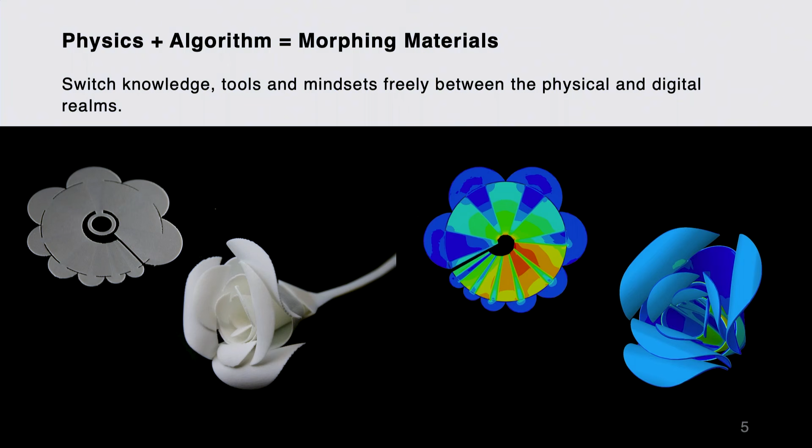So embodied intelligence in the context of physics plus algorithm. We design a lot of morphing materials. So when we think about those, we really think about it as material systems that carry hidden forces that are usually calculated or predicted based on some computational algorithm. That's why we think morphing materials are physics plus algorithm. So usually you deal with a certain physical morphing mechanism and you think through how do you compute them, model them, and how do you do inverse design by leveraging these kinds of physical phenomena.

So through the years, we've been looking into different material systems that could leverage this mindset for design and engineering, all the way from shape memory plastic to pneumatic elastomeric systems to even clay and even edible gels. And most of the projects share the commonality of physics plus some sort of computational design behind it. So here are some quick examples.

So for example, we once looked into basically the idea that residual stress release inside thermoplastic can be seen as a way to engineer self-folding and self-assembled structures. So essentially, we're using FDM printers, fused deposition modeling method, to extrude shape memory polymer and lock some residual stress in place while you are printing them.

And then later, if you try to heat it up, the stress will be released and the filament tends to shrink. So if you print this shrinkable material on top of a non-shrinkable material, you can create an effective bilayer that will bend when you introduce extra heat to it after the printing. So this FEM simulation is basically trying to simulate what's happening, and then, knowing a bit of the physics, we know we can do some sort of a bending actuator.

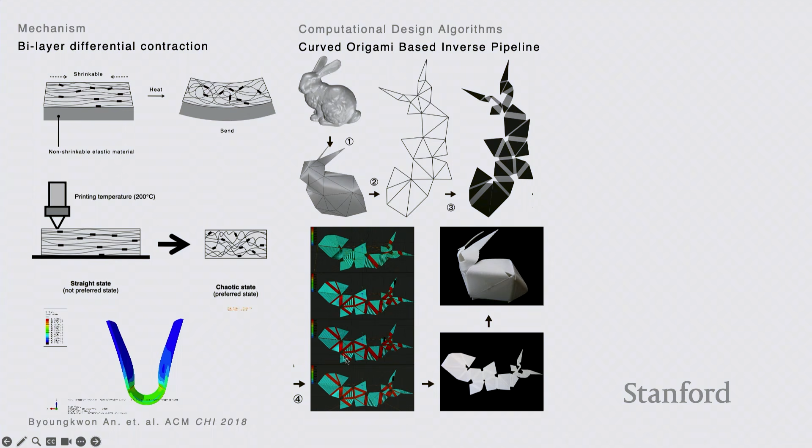We move on to the computational side, try to leverage an origami algorithm to compute the local bending angle needed, the accumulated bending angle needed at each hinge area, so that we can generate a G-code with prescribed residual stress at each local folding area. And we print everything flat, but once you put it in water, heat it up, it can self-fold back into

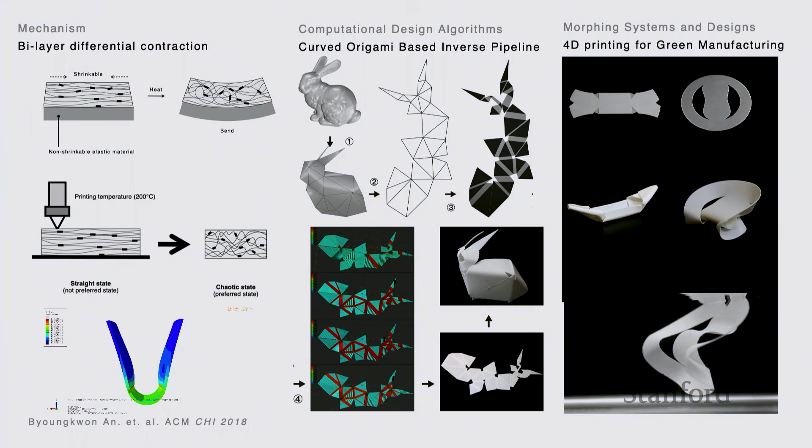the Stanford bunny shape. And with that, you can start to design all interesting shapes that can self-assemble from a flat piece. A flat piece, when placed on a hot water surface, turns into a boat, or a disc turns into a chair. So this is a little bit inspired by IKEA flat pack furniture to save packaging and shipping space. But once it's on site, you could assemble them. But in this case, it could assemble itself.

If you're interested in the computational part of it, this is a very simple and standard origami flattening algorithm. You simplify a 3D model into a finite number of flat faces, and you calculate the folding angle needed at each hinge. But here we need to do something different from a traditional origami model.

In a sense, we need to compensate for the width needed, because it's a smart material. Any material needs a certain width for bending to happen, whereas in the traditional origami model, because it's based on very thin paper, that width is ignored. So we had to do some offset on the algorithm side to take into account the width of each bending region. And the width is indeed different depending on the bending angle needed.

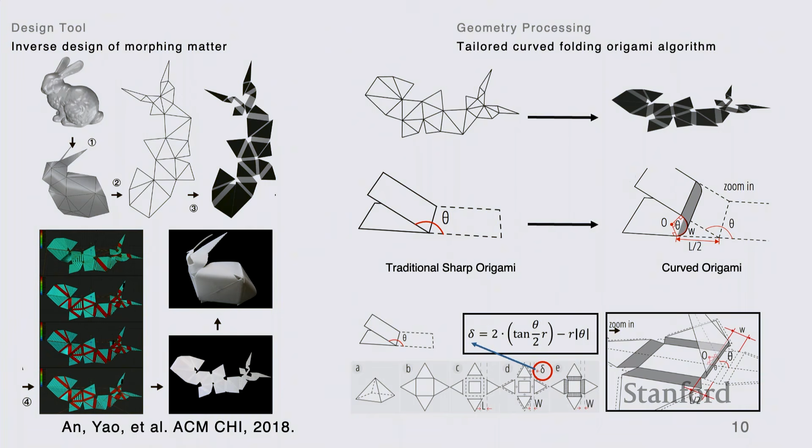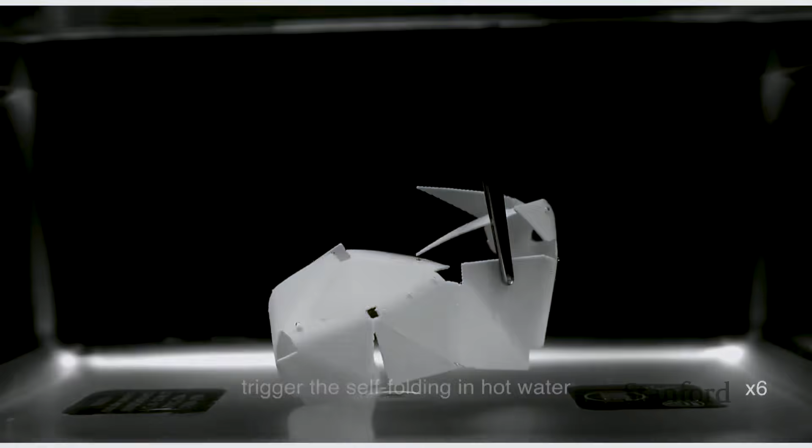Anyway, this eventually gave us a software platform where you can input the 3D model, simplify it into flat faces, calculate the bending angle, generate the G-code from it, and print a flat piece. This is showing that once you put it in hot water, the flat piece can self-fold into the bunny shape. So this is based on this very simple bilayer phenomenon.

Fundamentally, as I mentioned, this is related to the residual stress release of a thermoplastic, and the residual stress was built in during the printing process. So instead of doing a bilayer, we can explore a different physical mechanism, which is leveraging the local linear shrinkage rate. In this case, it's not a bilayer anymore. We print a single layer, but depending on the print speed or the layer thickness, we can embed different amounts of residual stress in different local areas.

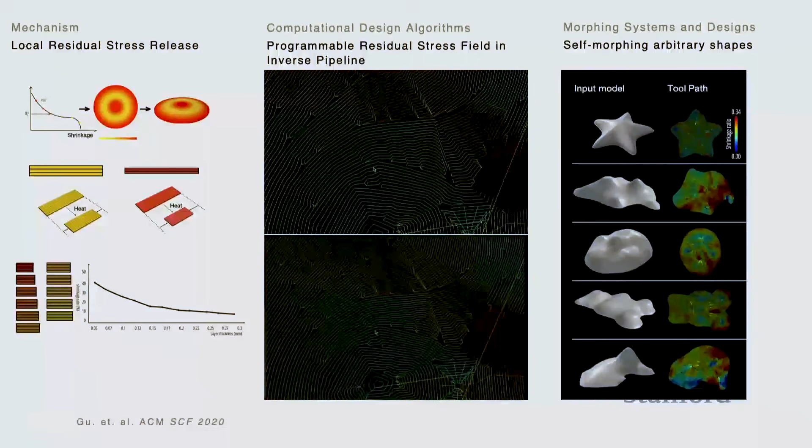You can print a disk. Once you heat it up, it morphs into a dome, for example, or a cone. And you can do computation now to make more arbitrary shapes. If you're a little bit into computer graphics, you might recognize that we can now analyze shapes that are non-developable. Origami shapes are a bit easier to handle geometrically because they're developable. So here we developed an algorithm that deals with non-developable shapes such as a human face or a very specific mountain terrain.

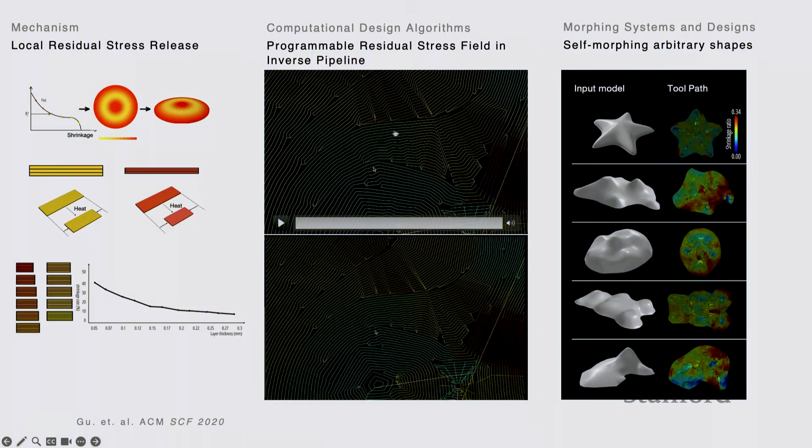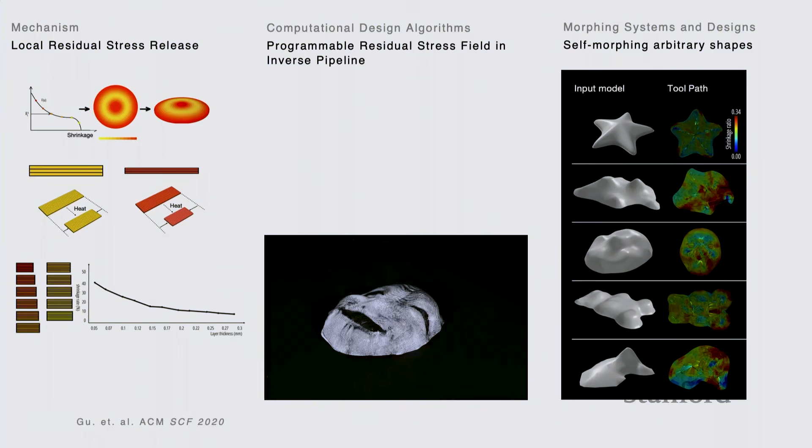Basically, you input the 3D model, it flattens it and generates all the G-code. You see the G-code here; the color indicates the stress or strain level. And we can also simulate how it would morph into 3D. And again, you print a flat piece, in this case a flat disk, that morphs into a face after you give it extra heat.

So we had a lot of fun with thermoplastic, and then we moved on to look at some other physical phenomena as well. This is a representative one that I love a lot. It looks at a physical phenomenon called differential swelling, tuned by the surface pattern. Imagine this is a swellable gel. You put it in water, and it just uniformly grows thicker and wider. But if we introduce sub-millimeter scale grooves on one side of the gel, it impacts the swelling rate and ratio across the thickness. The side with the grooves ends up swelling more slowly than the side without.

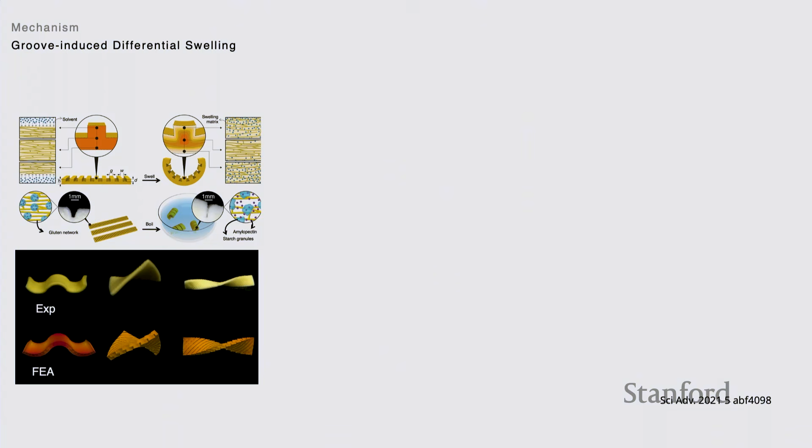So if you let it swell in a solvent, in this case a starch gel in water, you will see a flat piece bend up. Essentially, it's still a bending actuator like what I showed with the thermoplastic, but the physics going on is very different. This is differential swelling, and the previous one is residual stress release. Once we get to know the physical phenomenon, we plug it into a computational pipeline. In this case, we had to develop a pipeline to tell us how the grooves are supposed to be distributed.

So if our end goal is to get a rose flower, we produce a flat stamp with a groove pattern on it, and then we stamp it on a swellable gel to create the surface texture on the gel, and that's what we are showing at the bottom. So a flat piece, if we put it in a solvent, automatically starts to swell and wraps itself up into a rose flower.

This phenomenon is really straightforward, with no magic chemistry. It's a purely structure-modulated morphing mechanism, but on the other hand it's powerful because it's broadly applicable to soft matter that can swell in a solvent. It could be, for example, to some extent, your dumpling cover being boiled in pure water. It could also be some sort of elastomer or silicone sheet being swollen in a polar organic solvent.

So we showed in a paper that we can even use this to make fun morphing food. In this case, you can make a grooved flat pasta. They're all flat-packed, like your IKEA idea, saving a lot of packaging space for food.

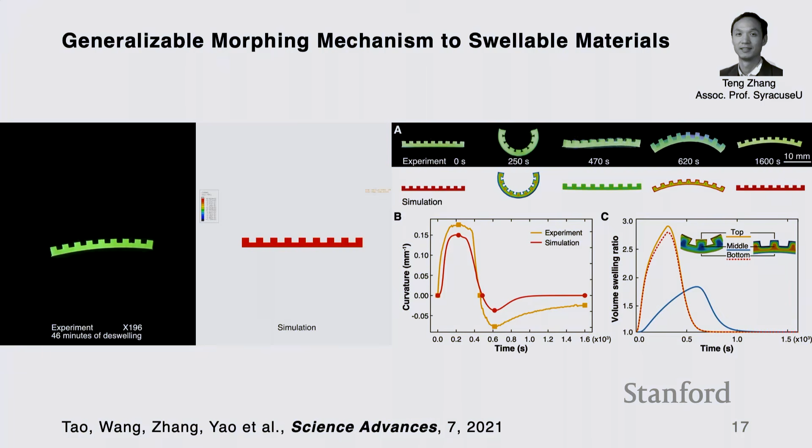Interestingly, if for a moment you ignore the physics, this is geometrically quite relevant to the pattern of the groove. So it turns out the width of the groove, the gap between grooves, and also the thickness of the groove will impact how much it bends. So there's a relationship you can derive experimentally, and then you can do regression, right, to get a sense how the curvature will be tunable based on the geometry of the groove.

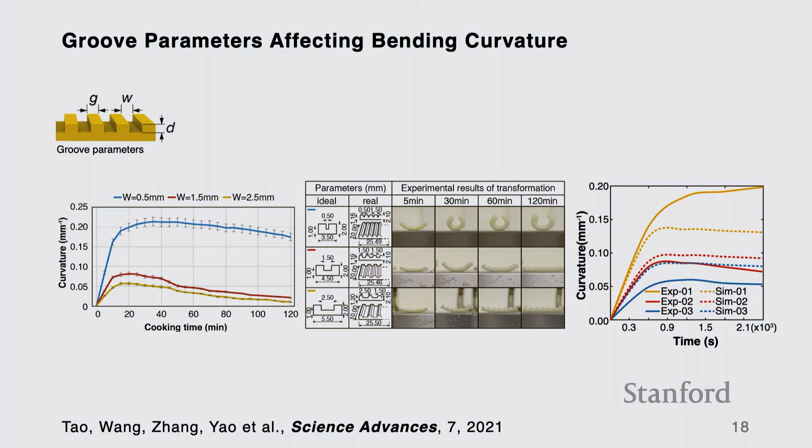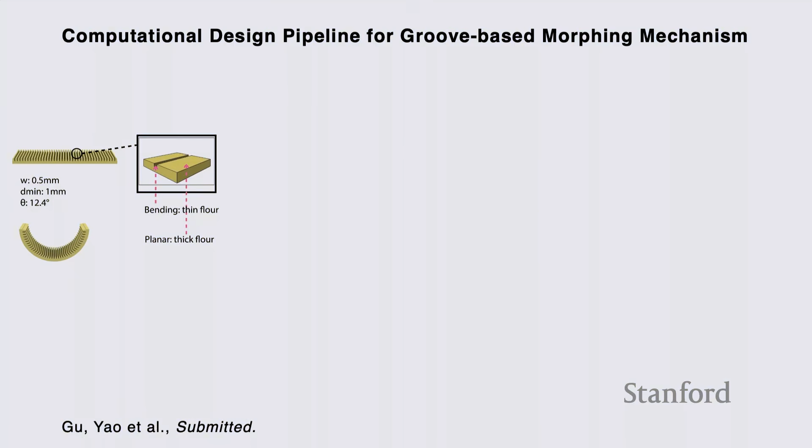So once we get that, we went into our comfortable zone of doing computational design with it. Based on the experiment, we concluded one groove contributes roughly 12.4 degrees of the bending angle. That basically means with two grooves, you get like 24.8 degrees. And you can imagine, I add one groove, I contribute like 20-some degrees. Then I add another one, I contribute 48. I add the third one, I contribute more. So that's how you could potentially design a flat sheet that can curve into any arbitrary shape.

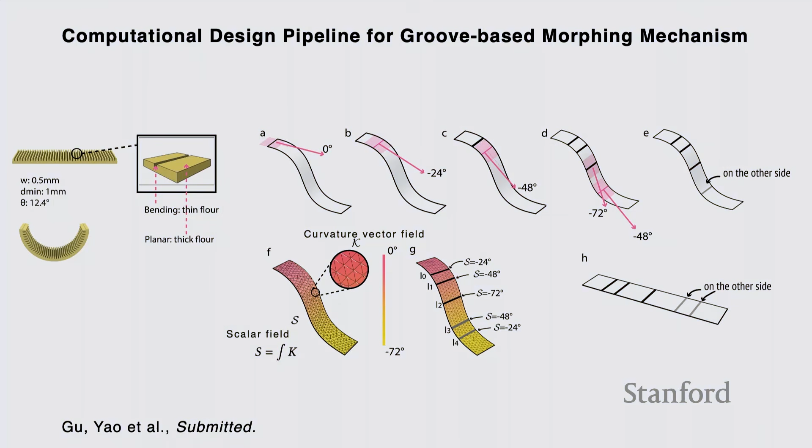But that's tedious. So in the computational graphics world, you can do this more holistically. Given a target shape you want your flat sheet to morph into, you could calculate the scalar field and then automatically derive the locations where you want to introduce the groove.

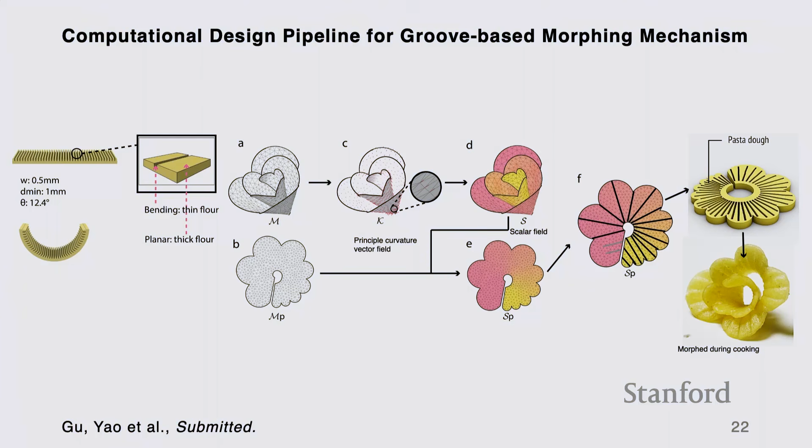So from that, you could go back to the complicated rose flower case I just mentioned. If you know your target 3D shape like a rose flower, you could unroll it to get the flat disk. You could then, in parallel, also derive the scalar field, and with that, you can map the grooves to the specific locations of this flat disk. Then we generate a 3D printed mold, which functions as the stamp. We use that to either mold cast or stamp on a flat sheet to get a morphing disk that will eventually morph into the rose flower if you put it into a swelling medium.

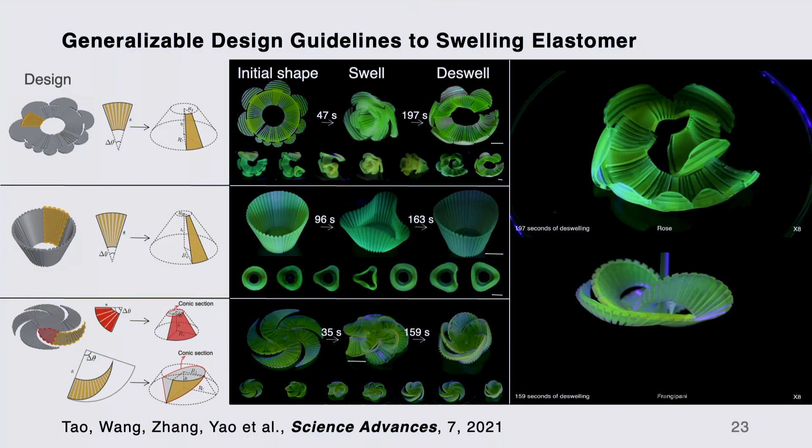And this can be applicable to a lot of gels. In this case, we're using PDMS. If you are familiar with microfluidics and some biomedical soft robots, you know PDMS is basically compatible with the human body.

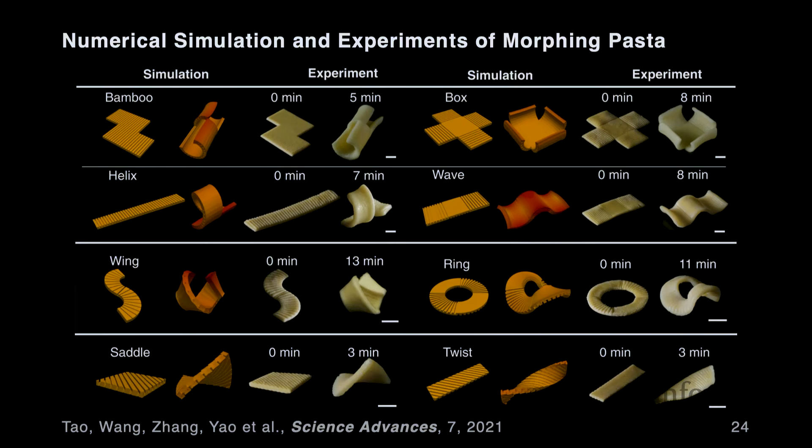So this is the fun application we did. These are dough, actually semolina flour based dough, and we are doing the stamping on top of the dough. Once you boil them, they can take on different 3D shapes. So this is the morphing pasta example. On the left, these are showing some finite element simulations, and you are also seeing some real samples of the pasta.

If you ask why pasta, it's really fun, and it's a very universal phenomenon, right? Flour-based dough-ish food can swell in your kitchen as you boil it. If you also do a simple calculation, with macaroni pasta, about 67% of the space is used to pack air. So if you make pasta that can be packed flat, you can save a lot of packaging space. We actually brought this to Italy, and in Italy, basically 1% of the greenhouse gas emissions is generated by consumption of pasta.

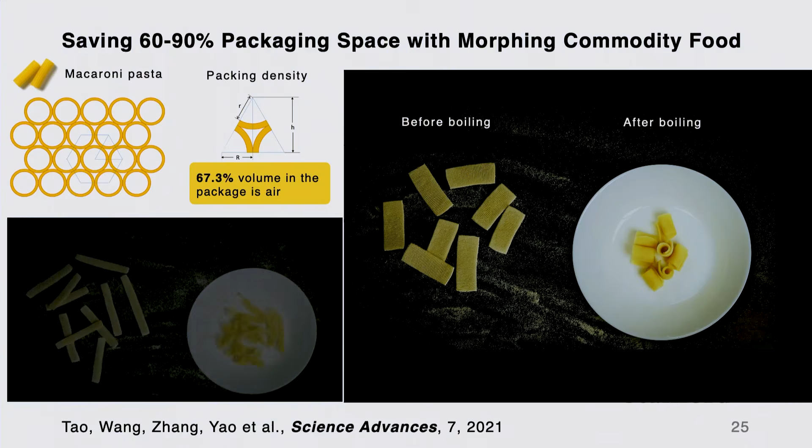So we eventually convinced Barilla, the biggest pasta manufacturer, maybe in the world, definitely in Europe, to collaborate on the project. So yeah, it's pretty fun.

Okay, so that's some sort of intelligence related to how physics combines with algorithm. I want to share my second point. That is that embodied intelligence can be sort of amplified by combining materials and mechanism. So I want to believe what I just showed are mostly materials. They are passive, right? They're gels, they're thermoplastic. They can do certain things, but they're also quite limited.

Some PhDs in my lab, through different kinds of projects, started to bring up the idea that if you can combine smart material with some structural intelligence or mechanisms per se, you could have more programmability and controllability in morphing systems. So when I say smart material, temperature, stimuli responsive, it'll bend, it'll shrink, it'll change stiffness. That's about it. But there's no degrees of freedom. There's no sophisticated kind of structural programmability into it.

So what I just played on this video is a stiffness changing material. So this is, again, a shape memory polymer, and in this case we had an almost invisible heating wire embedded in, but basically if you heat it up, it becomes really soft, otherwise stiff, and it can remember its shape, so it automatically recovers back to straight if there's no external constraint.

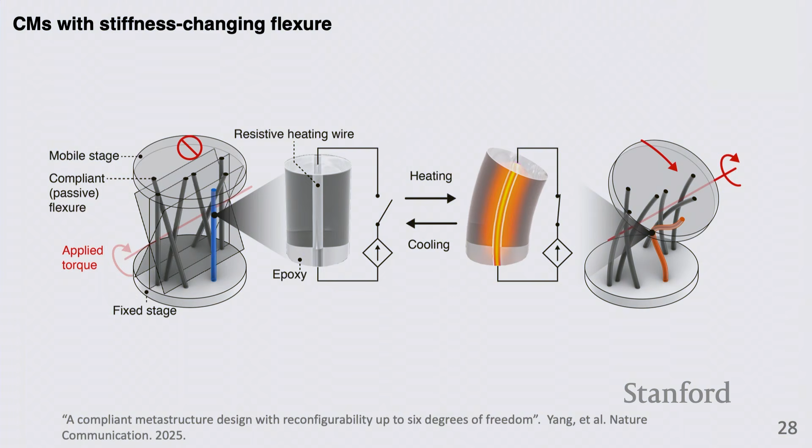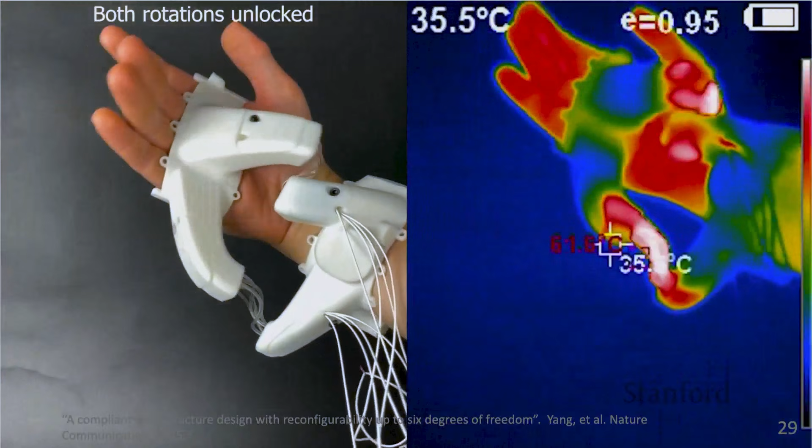And this is one example we showed in that paper. This is completely stiff, both rotations locked, and this one is up-down rotation unlocked. So the palm can basically push inside, outside, and this is left-right rotation unlocked. So now you can do left and right, but not up and down. And then if all of them are unlocked, now you have full degrees of freedom. We talk about using this potentially for rehabilitation or some haptic device.

And one thing that we ourselves are proud of is we introduced a rational design pipeline, basically like an algorithm that allows us to design systems that have all 6 degrees of freedom fully reconfigurable. You could ask for what you want. For example, only X translation is flexible, all others locked. This depends on how you, again, arrange the stiffness changing rods versus the other non-stiffness changing rods.

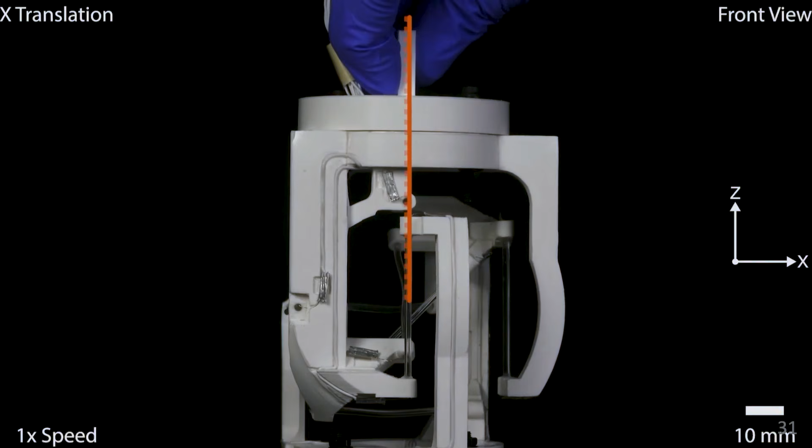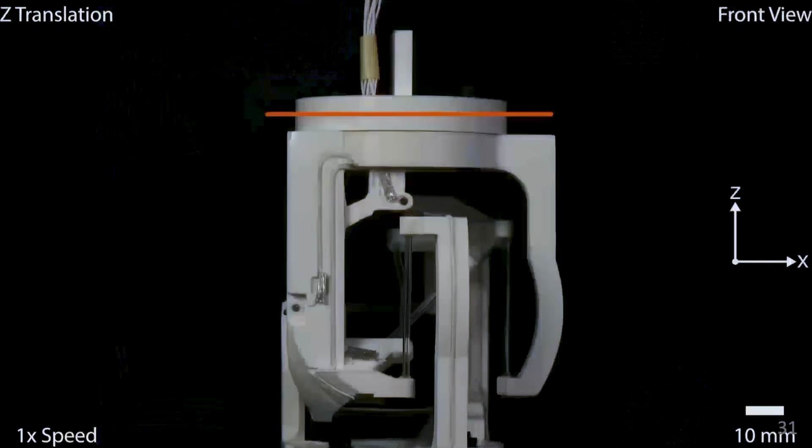And this is a video showing a bit of the same concept. So again, X translation now is freed because we heated up the selective wires our algorithm told us to heat up. And then this is Y translation being freed. It's already a different mode. This is Z translation being freed. This device really doesn't have any functional meaning. We just wanted to show the generalizability of the design method. And this is X rotation. So I'm gonna skip the video, but I think you get the idea.

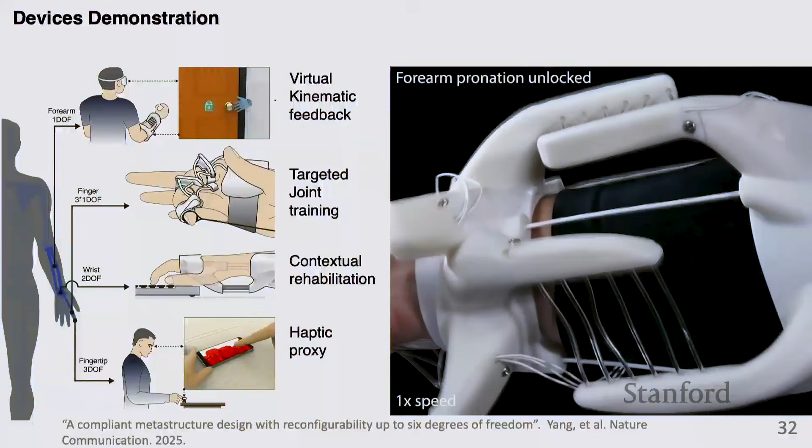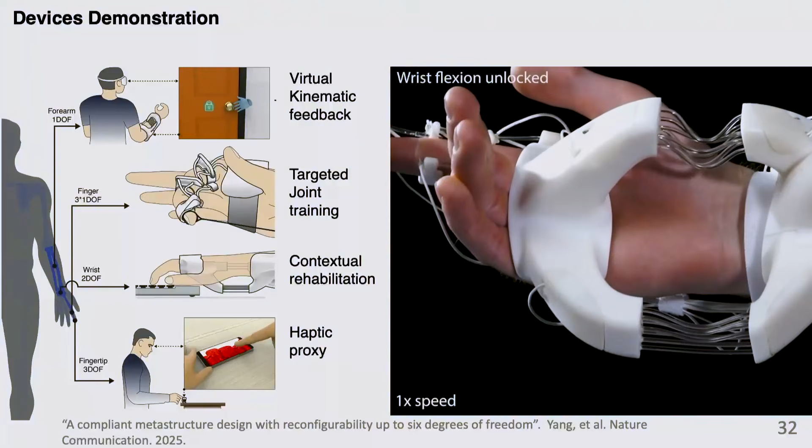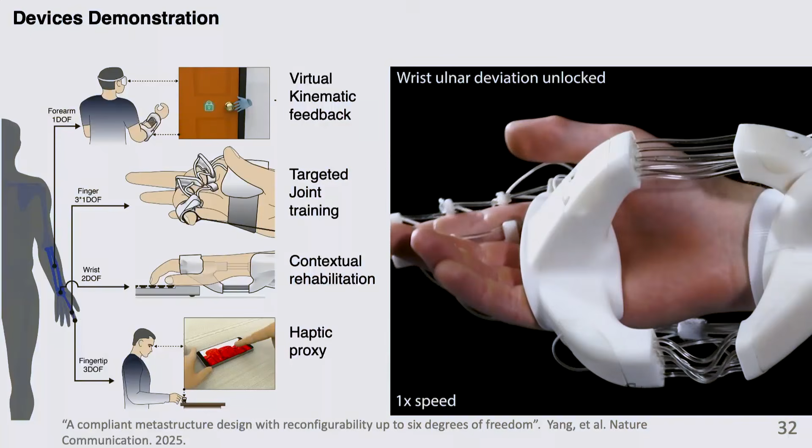So once we understand how to design the degrees of freedom as we want, we can look at some more specific applications. As I've already mentioned, we picture these types of exoskeleton devices can be used, for example, to constrain certain degrees of freedom, to do haptic, virtual kinematic feedback. For example, if I try to turn a doorknob, I can just free that rotational degree of freedom while locking the other ones. And we also picture we can, not fully heat up the wire, but heat up the wire partially with PWM, so that we can use it to do tunable rehabilitation training.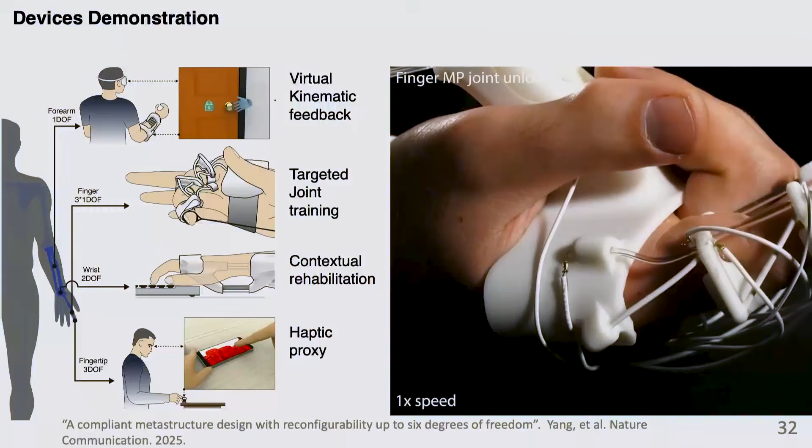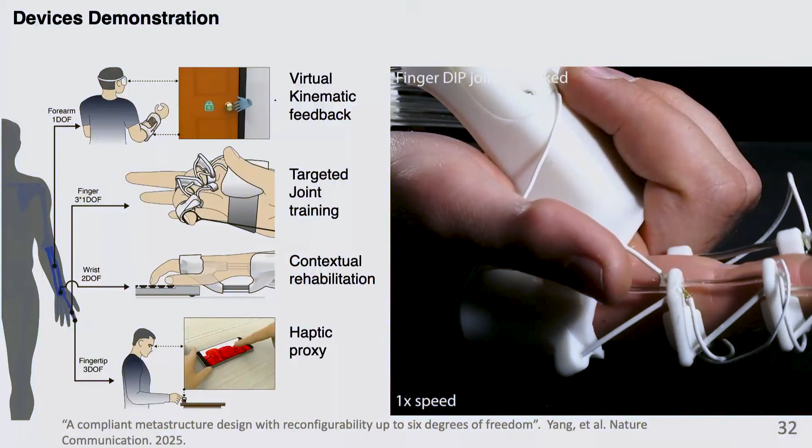And there are perhaps many other applications designers could think of. But I really see this project as a way to think about the combination of materials and mechanism, and it's very mechanical engineer friendly because my students, if they come from an engineering background, they love mechanisms.

And these are some ongoing work. So we're trying to explore some more complex sort of compliant mechanisms that could even have some computation or logical behaviors built in. So this is just a door latch, but it echoes back to my idea of physical cybersecurity.

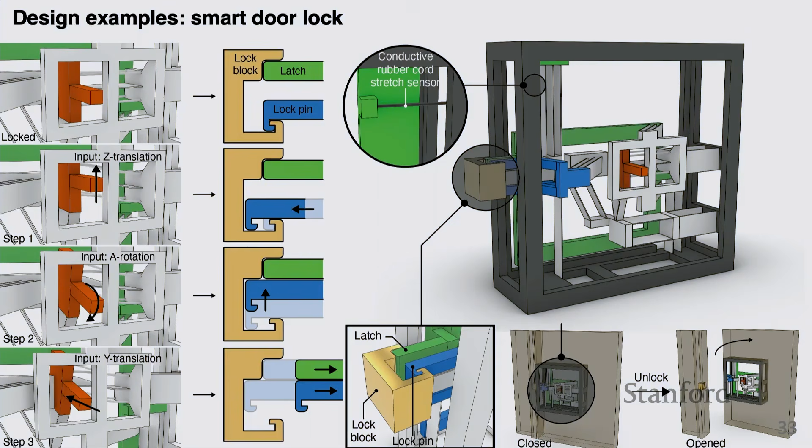So this door latch is purely mechanical, but you need to introduce 3 sequential motions to open it or to unlock it. So in this case, you have to do a Z translation first, followed by the A rotation, followed by a Y translation in order to basically unlock it. And this again is designed by this inverse pipeline we introduced in the paper.

This is just a video to show. Maybe the left one is a little bit more clear. So you can see the hand has to do that 3 sequential motion exclusively in order to basically open the door lock. We were very excited because this is really getting into that logical computation you could do with a compliant mechanism.

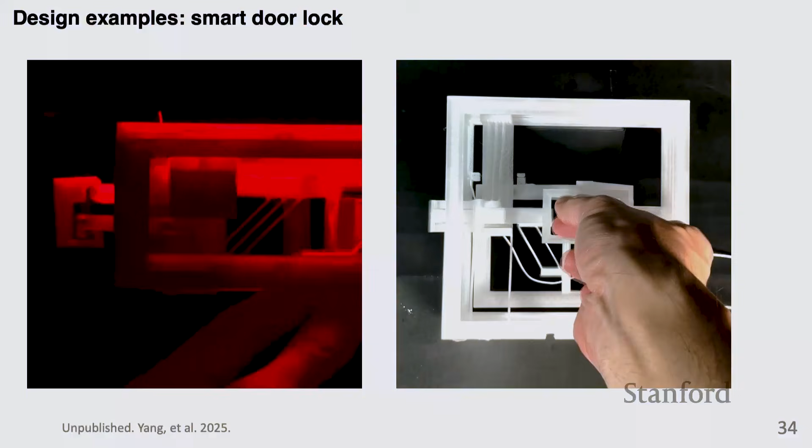And if we embed the smart rod, right, we can reprogram the possible logic you need. You know, this time you need to do this sequence to open the door, but next time if we soften a rod, you have to do a different sequence. So that's getting into that magical cyber physical security part of it.

We were also thinking, again, this is semi-conceptual, the design is not even mature, but the idea of leveraging this type of reprogrammable compliant mechanism to create a multi-modal robot. So this one, you think about the blue one as one group of flexures that can be softened versus the purple one as the second group.

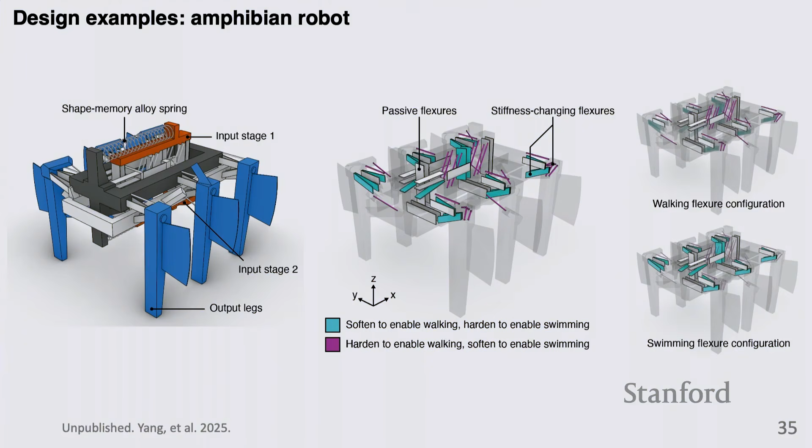And depending on which group you soften or harden, you could reconfigure this robot to either be a walker or be a swimmer. And this is just a simulation. We actually have not been able to implement this with a physical prototype. This is the walking mode, and this is the swimming mode.

No idea whether it's gonna work. At least the compliant mechanism part is correct, we are pretty sure. In terms of the swimming or walking, we have a lot of optimization to do.

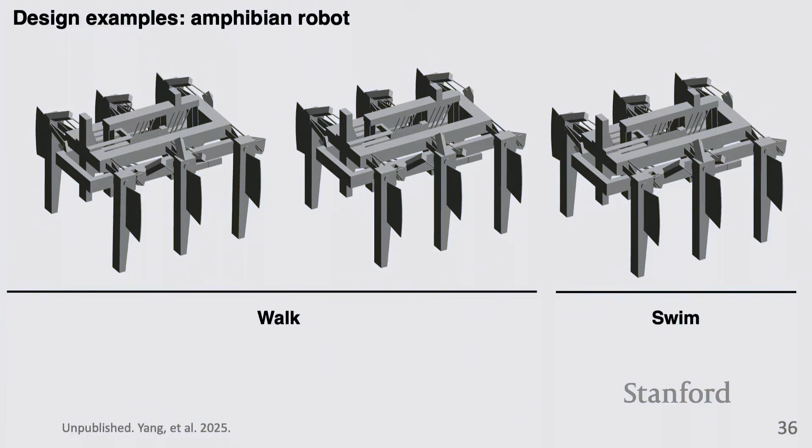So this is a different example. Again, I'm just stitching projects together to make the point that material in combination with mechanism could get us a little bit further than a pure material-driven system.

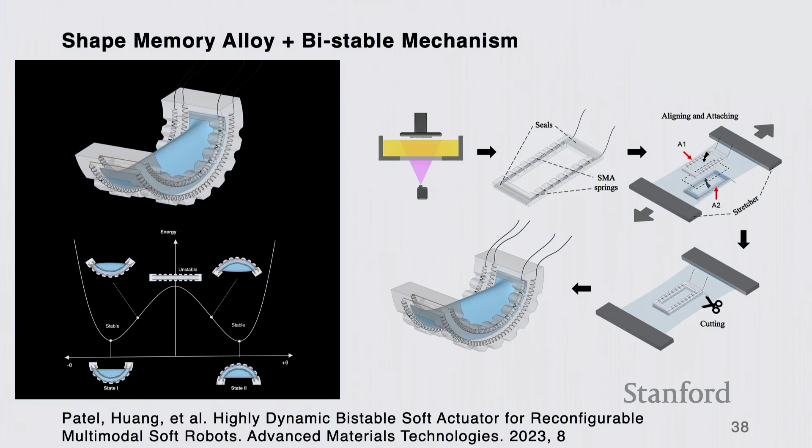Then by embedding this shape memory alloy, we could basically leverage the shape memory alloy controlled by electricity to quickly flip the side of this bending actuator per se. And this is what it is doing. Basically, again, you give it a current signal, it quickly flips.

If you have played with shape memory alloy, you know it's a little bit notoriously slow and pretty weak. But by combining that into a bistable mechanism, you can actually turn a very slow actuator into a pretty fast and hopefully more practical one for building robots.

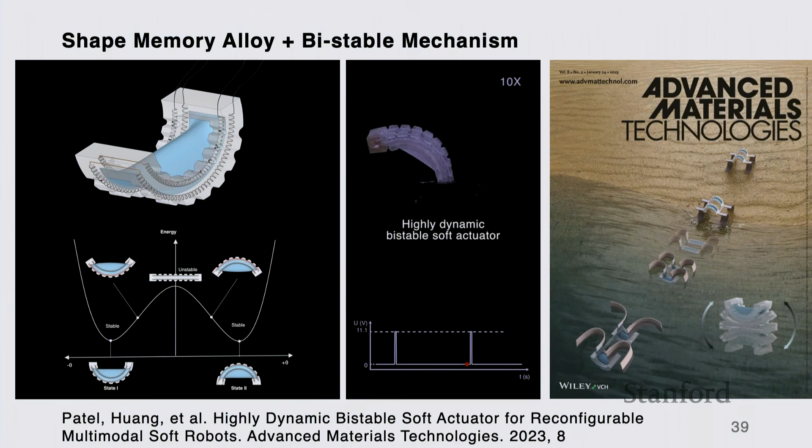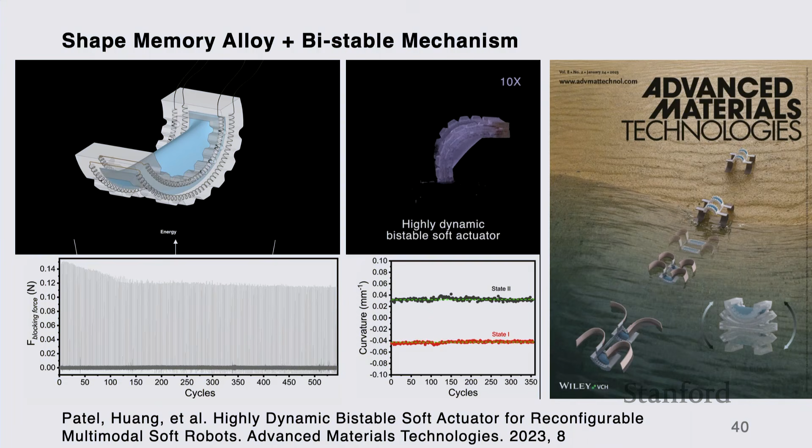And we're also showing this actuator has pretty good repeatability. In the lab, we tried to run it for more than 500 times, basically cycling back and forth. It's still behaving pretty well. And these are some of the robots we were able to build.

So this is the amphibian robot. Basically, the body is made of 2 of those bistable actuators. This is the walking mode, and then this is at the bottom. You flip the 2 actuators at the body. You make it into a swimmer, and this is very tiny, but it's showing this is walking.

This is getting into the water, and once it's in water, it flips its body, and the legs become the wing. Is it the wing? Yeah, the wing. And it started to basically paddle.

And because I mentioned it's very fast due to the bistable mechanism, you can make a jumping robot with shape memory alloy, which I thought is pretty magic. Because again, the actuator itself is very weak and slow.

So you could also basically reconfigure the body shape of the robot. So in this case, you can turn a walker into a roller. If it has to roll down the hill, they form a ball shape. Otherwise, they can just bend up and down to walk itself.

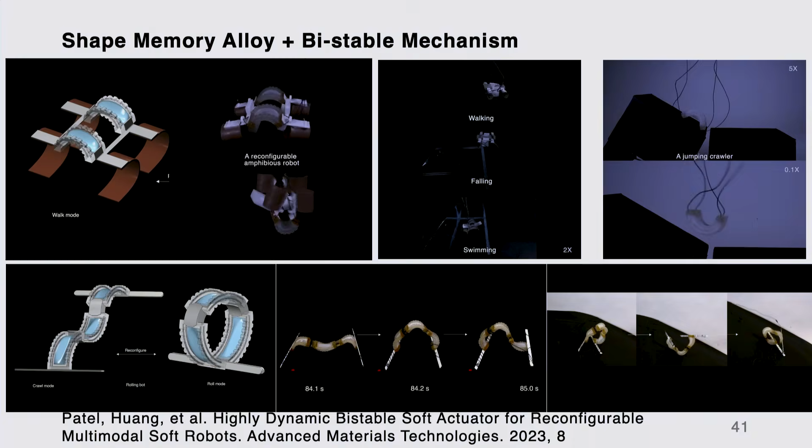Yeah, that's that. Continue with my third point.

So I also think, and we discussed this with many colleagues, about how far we can push with basically mechanical systems. I visited the robotics center and many robotic labs this morning at Stanford as well. I definitely saw a lot of hard robots, basically robotic arms driven by motors, with a very classic robust design.

And ultimately those machines give us the most precise control, right? The amount of torque is more ideal for heavy duty things. And it's fully controllable in a sense. You can easily plug in machine learning or sophisticated control policies to control those robots.

And mechanical systems or material-driven systems are the opposite. They're slow. They're not precise. They're very weak. Absolutely, in the field of soft robots and mechanical intelligence, we discuss a lot whether there's a killer app at all for mechanical systems.

I think we more or less started to reach the conclusion that maybe there's something that can combine both mechanical intelligence and computational intelligence and reach somewhere neither could achieve by itself. This is super experimental, exploratory thoughts. I actually can't really think of a very convincing robotic system that shows both perfectly.

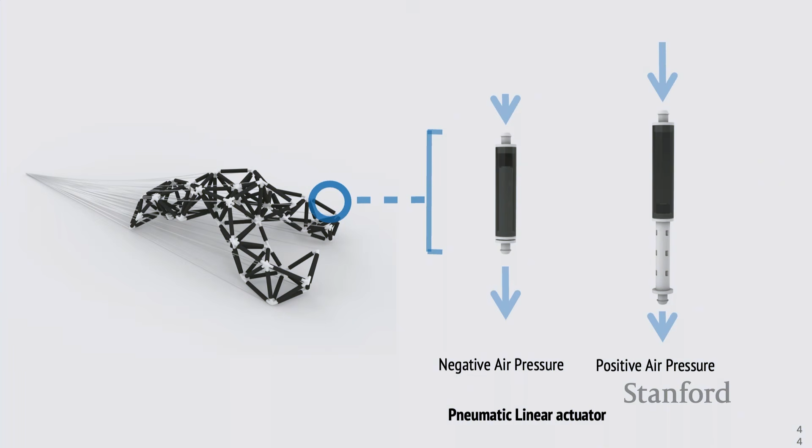So if we try to make a morphologically really complex mesh robot like this, in this case using pneumatic linear actuators, you have to have lots of separate control units, a lot of actuators, a lot of wiring, if you want to independently control each beam or truss. So for a lobster robot like this, you need 67 control modules. So we didn't want to do that.

We got quite inspired during my visit to the Northwestern Robotics Institute. Some biomechanics people told me about the muscle synergy concept: multiple muscle groups are grouped and work together to achieve tasks more efficiently.

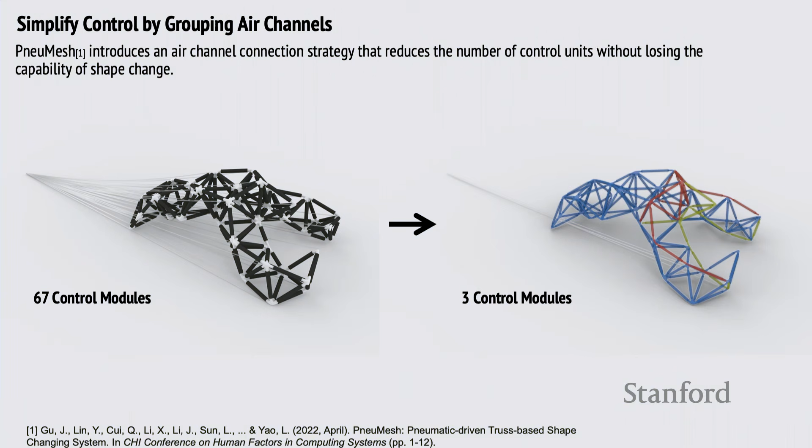So we started to look at this idea and thought maybe there are ways we could also mechanically group the muscle actuators together. So instead of 67 control modules, maybe we could have much fewer modules. In this example, just 3 control modules, but allow the mesh robot to do equally sophisticated things. So we ended up doing that.

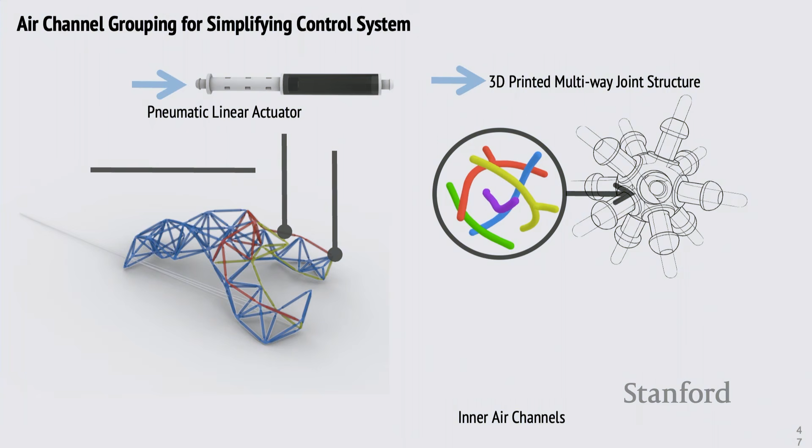So basically, if we need to group them, each node may have to carry multiple air channels. So we developed an optimization algorithm to automatically generate the air channel connections, and the basic idea is very simple, right? You have 3 groups, for example, represented by different colors, and depending on which group you deflate or inflate, you could get quite different actuation behavior.

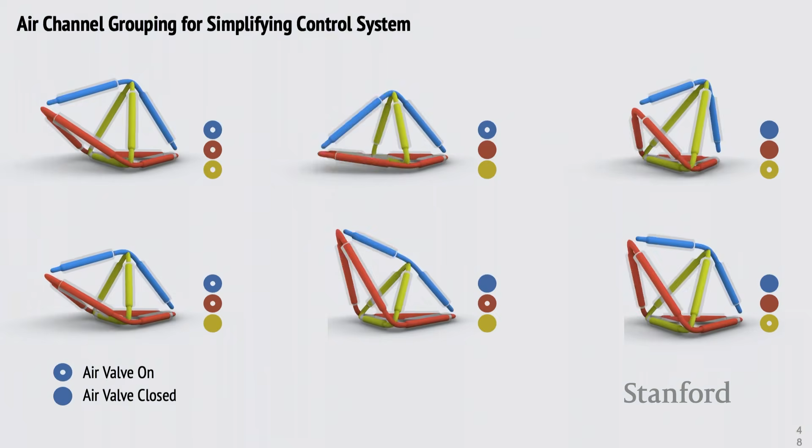So the design problem indeed is a little bit complex. You have to think about which beam to group with which, and you also have to think about the control sequence of all those beams, basically the control policy aspect.

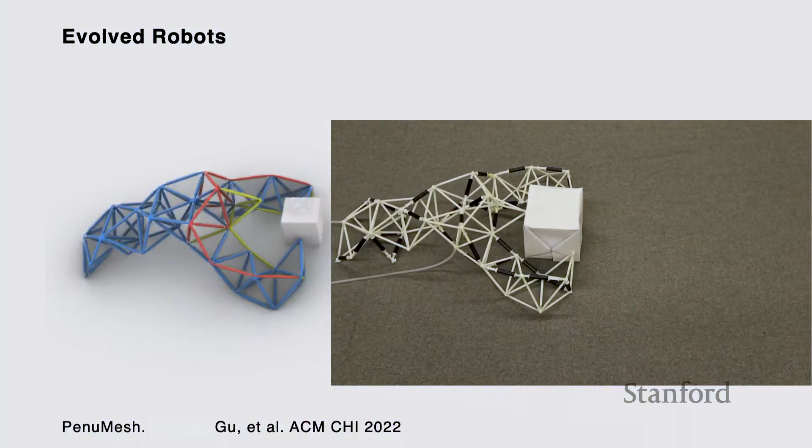Yeah, this is one of the examples. Again, that lobster designed by the idea I just mentioned, and we also tried to implement the physical version. You can see this lobster is only carrying 2 tubes in this case, so it's grouped into, I believe, 2 groups. And I mentioned the design task is kind of complex if you try to do it manually. You have to think about the grouping.

Also, each actuator control, how much contraction ratio you want out of each actuator. Also, the control sequence, basically the control policy, which group will be triggered at the same time, things like that. Now, if you want your robot to do multiple kinds of tasks, this is getting even more complicated. What if I wanted it to turn around while lowering its body? So it becomes kind of a multi-objective design task.

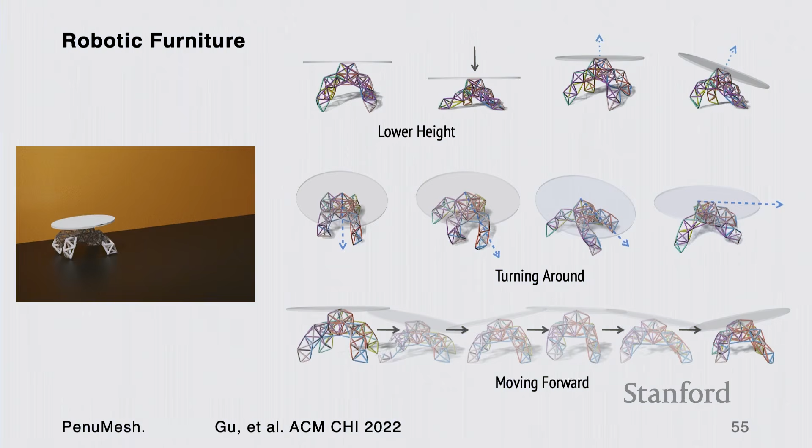Eventually, we decided a simulator and a manual design, meaning manually selecting beams in a software system, is not really practical. So we started to get into optimization methods. This was an earlier version, basically using a genetic algorithm to figure out how to do multi-objective optimization.

Basically, given all the input design factors, we can figure out how to group the channels and how to control the inflation and deflation. And later, we also explored how to use reinforcement learning to handle similar tasks. And recently, we started to also leverage generative algorithms to come up with the robot design as well.

Yeah, this is what we had out of the genetic algorithm. Again, the idea of this 4-leg robot being able to do multiple tasks through the optimization method I showed in the previous page. So it depends on the channel grouping and also the control signal. You could let the robot do different things while not changing the grouping, obviously. So this is showing walking, rotating, tilting, lowering the body, and things like that.

And why are we interested in such a complicated mesh anyway? I saw many mesh robots much simpler, right? Maybe like a single unit. I know colleagues over in the mechanical engineering department at Stanford have some really cool robots made of 1 or 2 units, basically maybe like 10 trusses. But we were interested in hundreds of trusses, partially because we can do it with the algorithm, but also because we were interested in understanding how that morphological complexity could bring some unique design spaces.

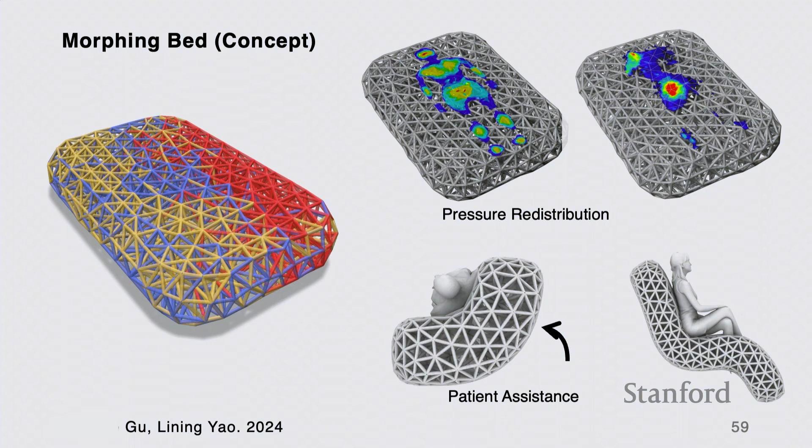Hardware-wise, not sure. So this was a proposal we wrote for a hospital, basically a morphing mesh bed that automatically fits the body shape or automatically adjusts the patient's body posture, because they get tired being fixed in one pose.

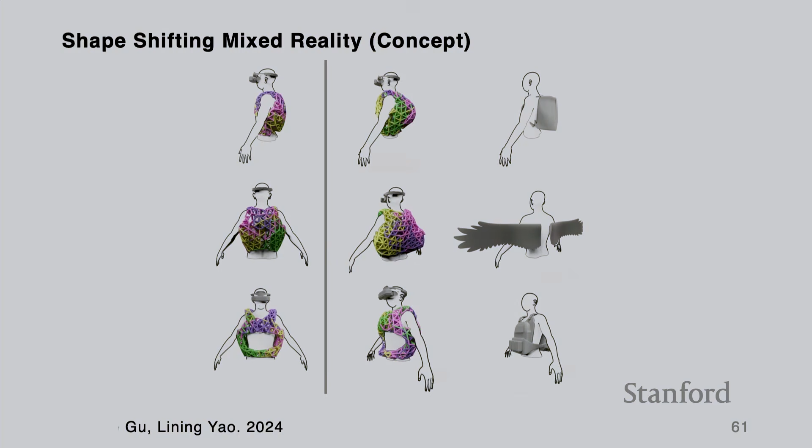You could also imagine if the mesh gets complex enough, you could really physically render different physical objects in a mixed reality environment, or in this case, basically give people different experiences. Say you are playing a game and you turn into a bird, how that physical mesh can morph. Not only is the shape morphing, right? Your center of gravity will be shifted as you are transforming the physical piece you are carrying as well.

Okay, so the last point I want to articulate: why embodied intelligence is interesting, what it's good for. I started with that question. I guess I didn't give an answer, but these are definitely the more tinkering side of it. My lab was also very interested in looking at how purely ambient-energy-powered systems could play a role in the field. Imagine field robots deployed massively in a distributed fashion that eventually degrade into the field.

And this could be convincing for why you do not want electronics to be part of it, why you want really cheap things to be made, why you maybe want minimum intelligence but still be able to execute the task as intended. So we started to play with this concept called ecological physical AI, or ecological morphing matter. The idea is they are some sort of mechanically intelligent robot, but they are powered by the environment, whether it's sun, moisture fluctuation, or even geothermal energy.

And you design a physical system that could smartly harvest that energy, and also maybe some sort of mechanical computational unit that could take this input signal, process it, and make decisions in terms of what to use that energy for on the actuation side. So that's a framework we started to develop. This is not published yet, but it represents some of our thoughts: how you perceive natural stimuli as signals, how you build mechanical devices that rationally filter and process those signals, and how you couple that with morphing materials and structures to do useful things.

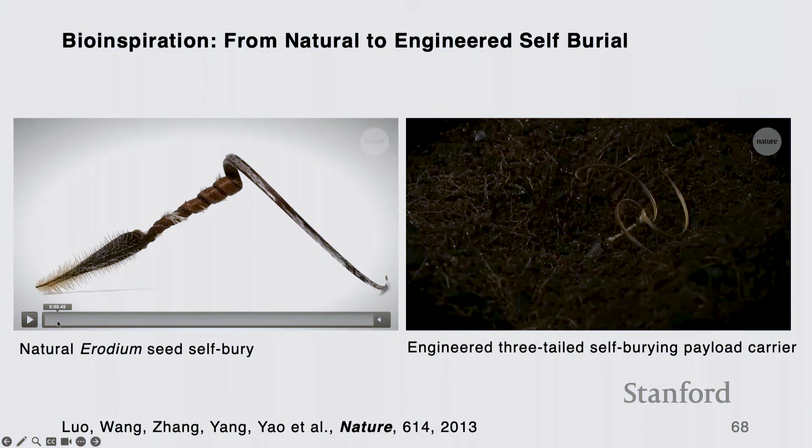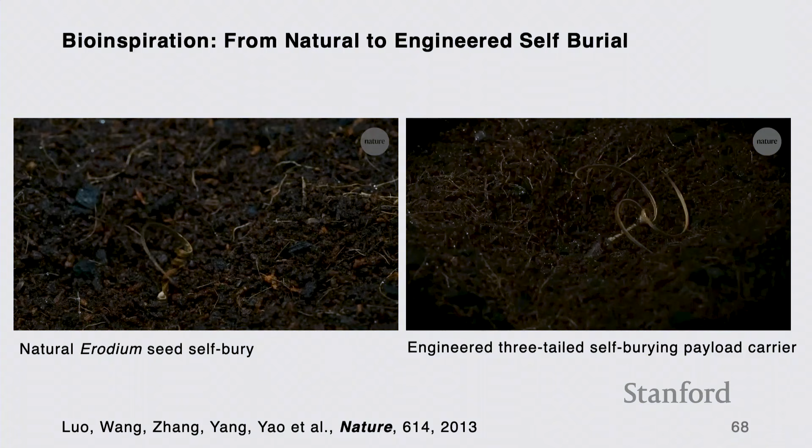So here is an example of, again, purely passive, a little bit smart, not quite smart things that play a role in natural conditions. This project is inspired by a seed from nature. It's called erodium. Basically, it has a coiled body that's responsive to moisture. So in this case, rain comes, the coil will unwind, and that unwinding generates a rotational motion, and as a result, generates a thrust force downwards to push the tip into the soil.

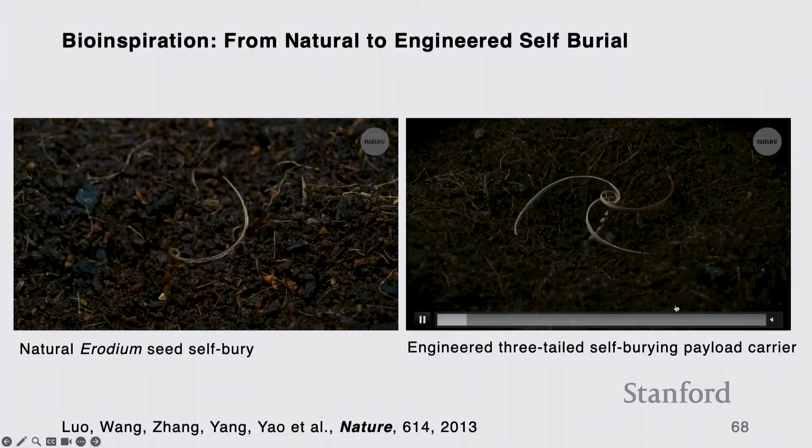I'll play again. Again, the coil unwinds, the whole thing rotates, and then pushes the tip into the ground, and the tip is where the seed is embedded. So this is also a little bit like a power screw. And we got inspired and started to try to make a biomimetic version of that. So on the right, this is made in the lab. The raw material is just wood veneer, white oak or maple wood veneer.

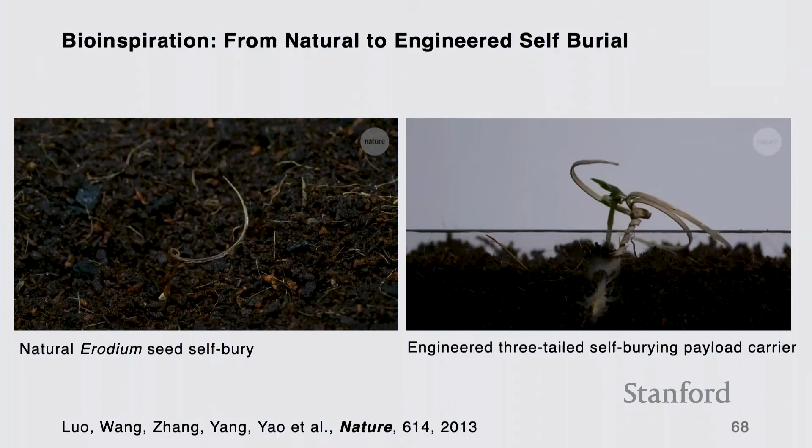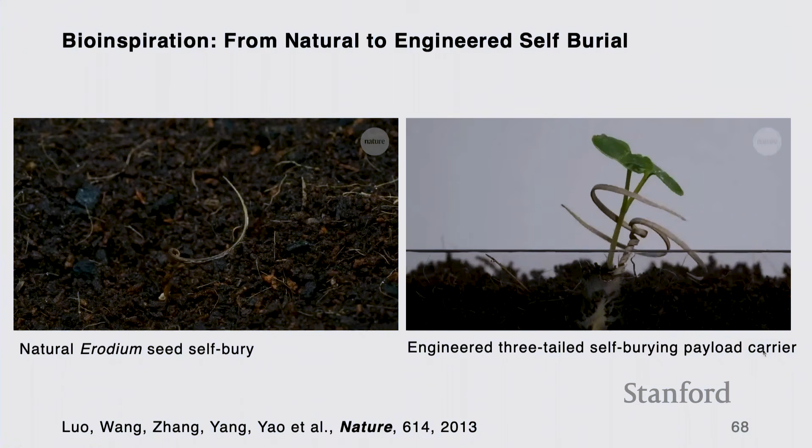If you can engineer your own version, you can carry the target seeds you want. So we were very interested in reforestation. Right now we're working with the Cal Fire Department and also on the East Coast with the Cornell Forest, trying to engineer seed carriers for specific tree species. So the idea is that you could carry many of those. They're biodegradable, made of cheap wood veneers, and you drop them onto the ground carrying the target payload. And once rain comes, they self-drill into the ground.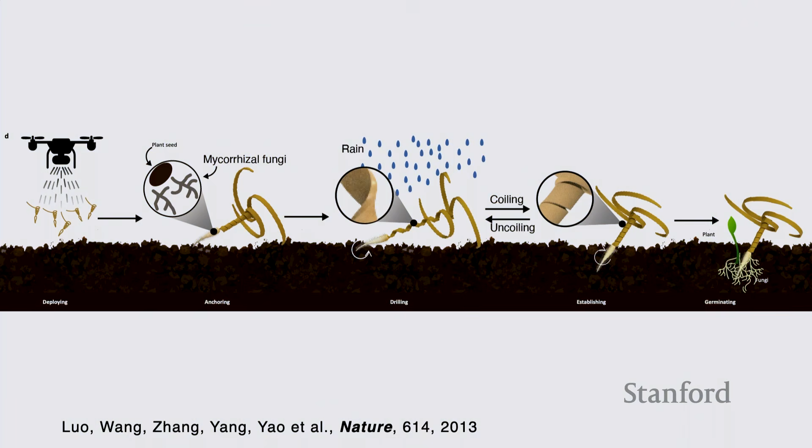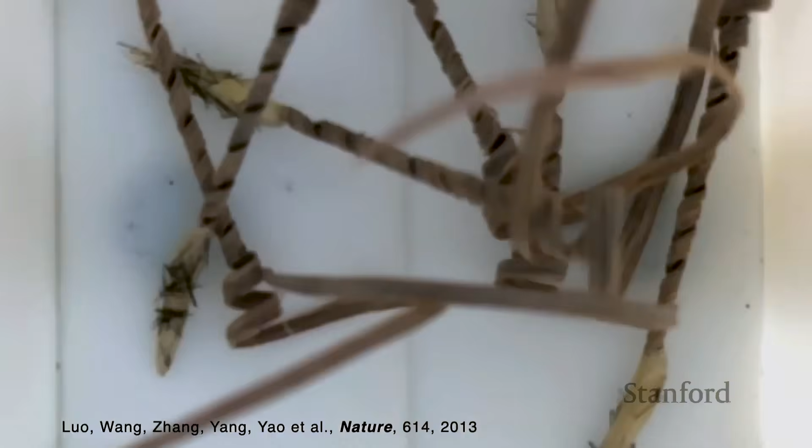Drilling into the ground is very helpful to improve the germination of the seeds you are interested in. And this is a video showing an earlier field test we did at Pittsburgh. Again, it's a really early stage test, as you can see, with a really small box, only carrying tens of seeds. But we were able to show we can drop them onto the ground and they respond to the rain in the afternoon and self-drill into the ground.

So through the project, we also got to collaborate with a lot of ecologists, and we learned reforestation is still a very big challenge. Because right now people have to grow seedlings and dig holes, so they manually go up to the mountains and put the seedlings in. It's a lot of resources, and it's also very dangerous if you have to go to sharp slopes to do seeding. And trees are much harder to germinate than vegetables. So it makes a lot more sense for us to apply this technology to improve germination of tree seeds.

And on the engineering side, we're looking into how we could possibly do things better than nature. I'm not sure if you noticed the one in the natural system has a single tail. So later we started to add more tails and play with improving the torque of the coiled actuator. So there's a lot of engineering optimization work going on in the lab right now. And this is part of the result of the field test, showing we got some initial success for outdoor tests.

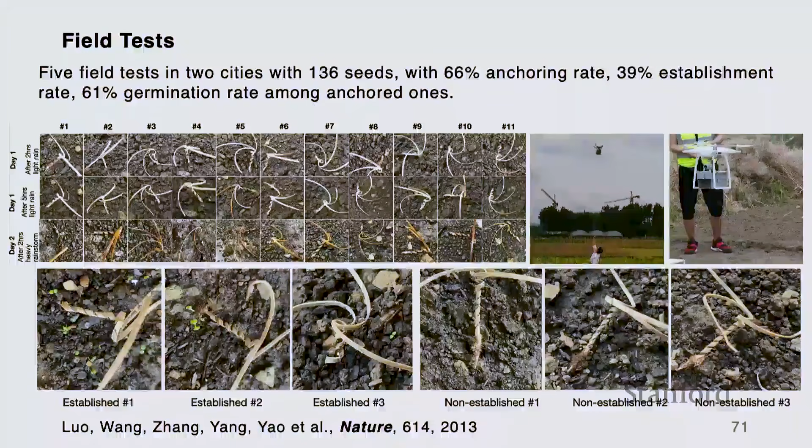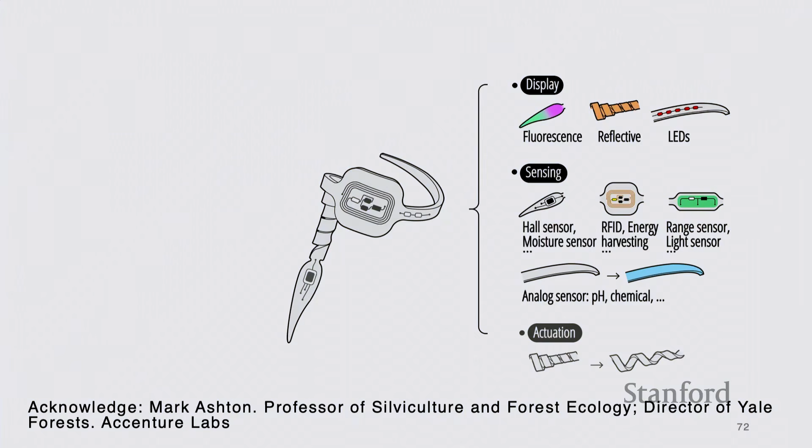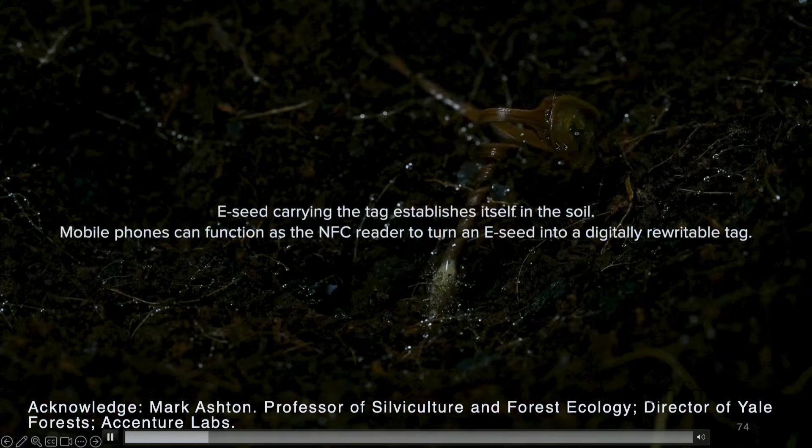And we also thought about how we could engineer those not-so-smart carriers to be a little bit smarter, in this case by potentially adding a sensing component and wireless communication as well. And you can even possibly network them to do things at a networked scale. This is an earlier demo to show you could equip an antenna to do wireless communication. The vision is you will be able to monitor some conditions, maybe underground conditions, and then send that information back to a drone that flies by later on.

So I have this slide. Yeah, we talked about how this could be really helpful for reforestation. We are also discussing with farmers about fertilizer, basically precision agriculture to save fertilizer use.

And one interesting part, if you're into space: a lot of the earlier studies of seeds of this kind were sponsored by space agencies, because they were also interested in environmentally friendly, to some extent energy-free, electronics-free systems that can be used to do soil sampling in outer space.

Because although the one we developed is harvesting the moisture fluctuation, the same mechanical principle can be used, for example, to harvest thermal fluctuation but do the drilling, only if you change the moisture-sensitive actuator into a thermally sensitive material. So yeah, there could be some really cool applications for outer space exploration. That maybe is also a killer app of mechanical computers.

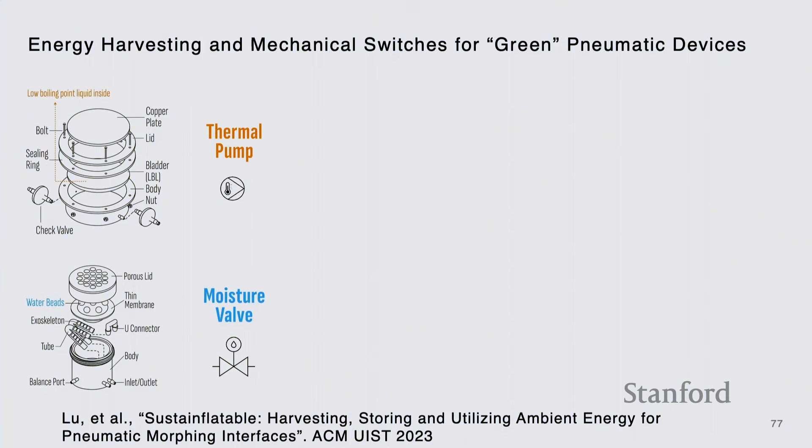The idea is that you build multiple stimuli-responsive pump and valve components, all mechanical. The pump is a way to harvest ambient energy and turn it into pneumatic energy, basically compressed air. For example, this video shows how this component is designed to harvest the thermal fluctuation in the air and accumulate compressed air into a chamber. So basically, it's a thermally responsive pump, right?

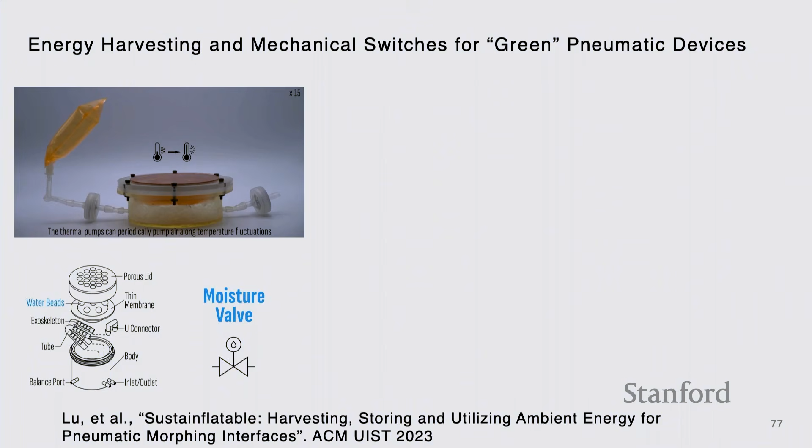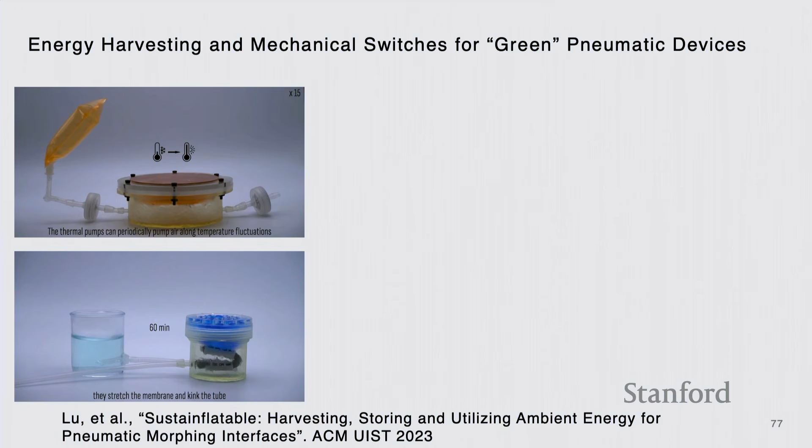So that's just two examples, and eventually we were able to construct a library of stimuli-responsive energy harvesting devices and valves. So you could harvest thermal fluctuation, moisture fluctuation. You can also harvest kinetic energy such as wind and hydro, and pipeline it all into compressed air. And you can also design valves that respond to different environmental stimuli as well.

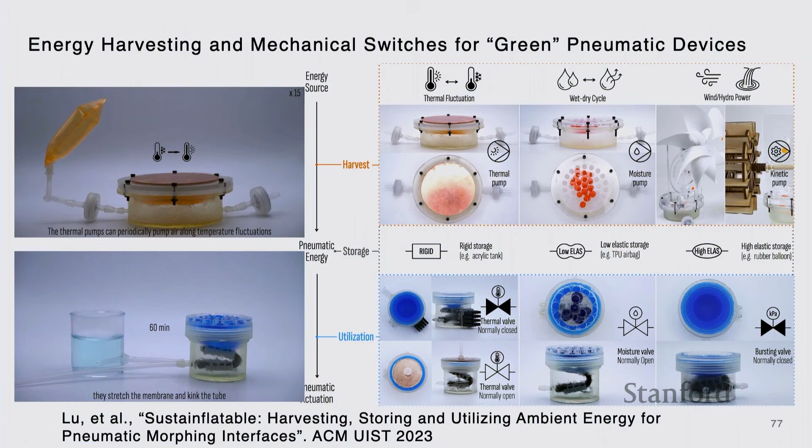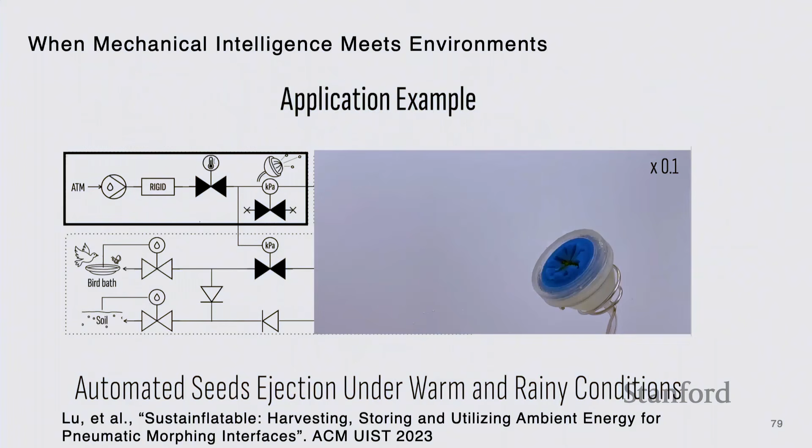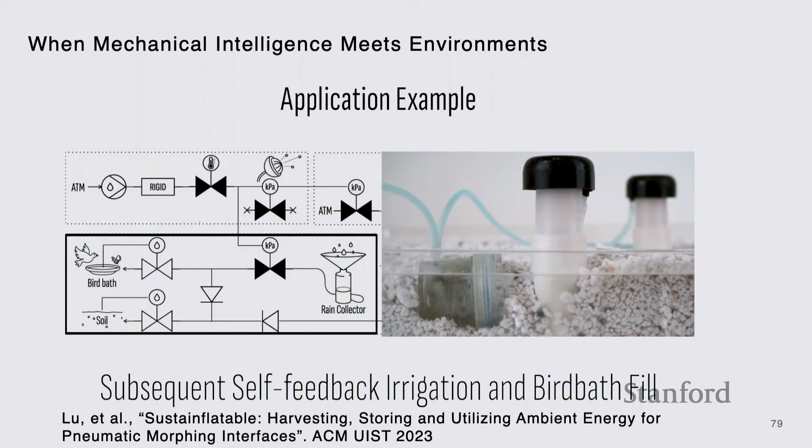So with all those in place, we started to construct pneumatic circuits that take into account the environmental conditions. This is getting very complex. If you're not super into pneumatic actuators, this may be a little bit trickier to read. But examples make life easier. So what I just showed is basically a dispenser that automatically gets triggered when the weather and the moisture condition in the environment is right.

And then after a certain amount of time, a valve will open up to do watering. And then after a certain amount of time, predefined again, fertilizer comes in. And then when you detect the right wind condition and it's also cold enough, a wind blocker will come out to protect the plants. I hope you guys are paying attention to how I'm describing it.

There are a lot of if, when, and and conditions. So basically, there's a lot of logic being programmed into the hardware system when we think about this kind of fully self-regulated plant device per se.

Okay, so to wrap up my talk, we discussed over lunch, hey, maybe the future super powerful devices have a kind of hybrid intelligence, both from the machine and from material intelligence. Or you can think about it as a system that's hybrid, right? You have the chips, you have the artificial mechanisms, and you could also have biological mechanisms or biological materials, living or dead, being part of it as well. That's the intellectual space my lab is tinkering around in at the moment.

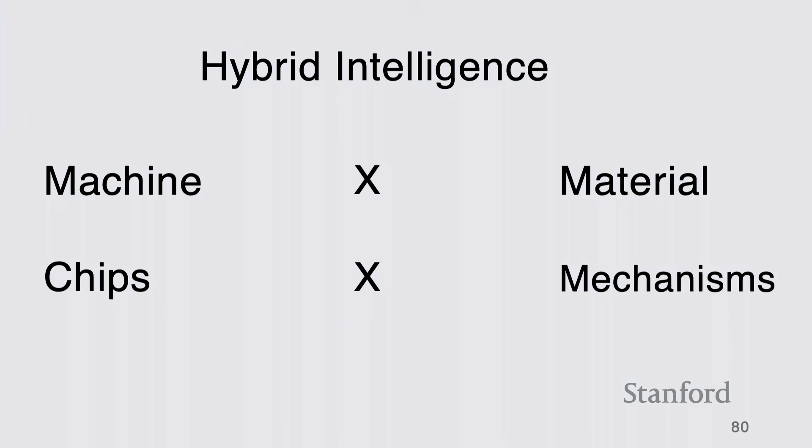Yes. So for the materials, you said you were measuring basically the width, length and the groove length and properties like that. Are you considering the surface area of diffusion to whatever solution you're putting it into? You're talking about the morphing pasta region. Yeah, that for example. So

when we do finite element analysis on those structures, we plug in all those factors. But it's not an analytical solution; we do numerical simulation, right? We measure the diffusion ratio, the change in modulus, and just let the numerical simulation do its magic. So it will automatically take it into account. It actually renders how the water diffuses into it, with or without the groove. In that case, yes, the surface contact area definitely plays a really important role.

But when we do that very simplified groove geometry matching to the contributed bending angle per groove, we did not. So I only told half of the story. The whole story is the groove, we know, plays a very dominant role, but not the absolute role. There's a lot of non-linearity to the morphing as well. But the computation is really lightweight if you simplify it into a pure geometrical problem. We kind of do an experimental, data-driven process to understand how the groove contributes to the angle.

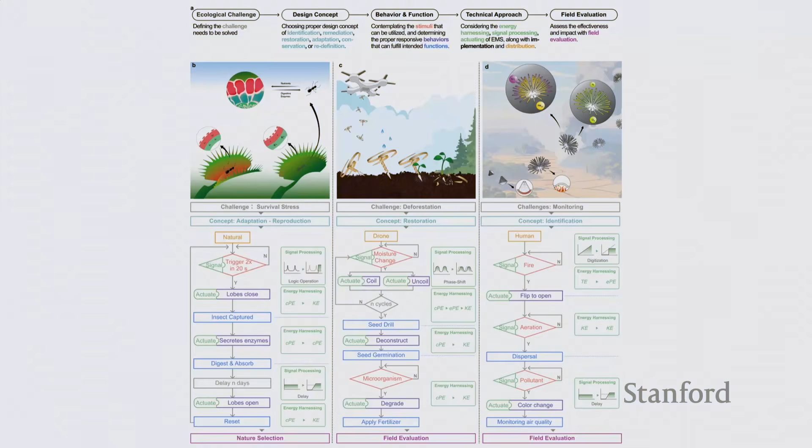So your work has so many different sources for actuation, such as kinetic and chemical reactions, temperature. I'm curious, do you have a favorite, or what are some other potential modalities of actuation that you will be excited to explore in the future? At this point, I feel like motor is awesome. And in terms of self-actuators, there's no single ideal one. Each of them has pros and cons. Most of them are weak, and it really has to be application specific.

Believe it or not, the wood actuator, the seed carrier, is indeed one of the very stiff ones. Because even when it's wet, the coil material itself still has about 5 to 10 gigapascals. Most hydrogels are like 1 megapascal or 10 megapascals, the soft materials. So nothing is ideal; it really depends on the application. Things I didn't show, but going on in the lab: through a defense-funded project, we are working on biohybrid, real human skeletal muscle. There are some good properties, like self-healing, even self-paceable, but obviously super weak and not controllable.